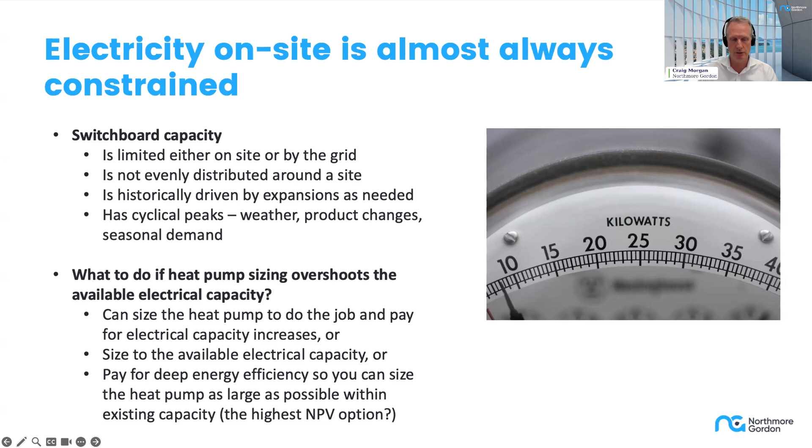So, well, I guess you could size the heat pump to do the job and just pay for the electrical upgrade. You can size it to the available electrical capacity, and that's certainly something we're recommending for some customers, that partial electrification is a pathway. Or you can use some of that avoided money you might have had to pay for electrical system upgrades to go a lot deeper on energy efficiency. And that way it means you can potentially size the heat pump or the electrification project as large as possible. And because you're going to get energy savings as well, it's probably the highest NPV option.

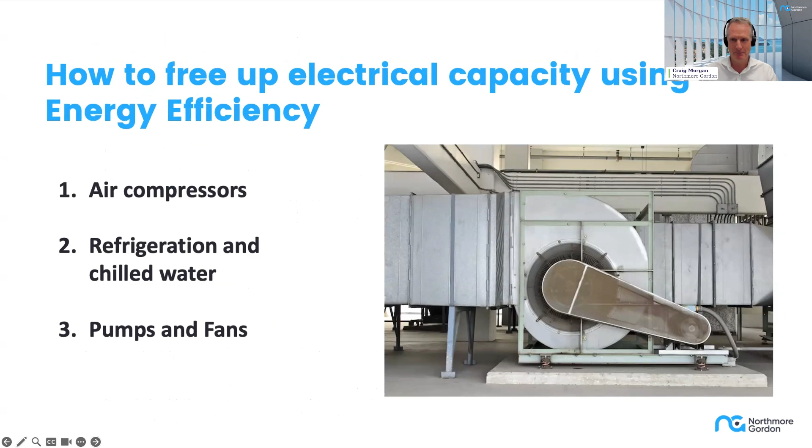And today, as I said, we're kind of going back old school here, focusing on air compressors, refrigeration and chilled water, and pumps and fans. Air compressors, for those of you who haven't been around air compressors a lot, you're probably not surprised, but I guess to point out that the total cost of ownership in air compressors is 80% dominated by their energy use.

And they can be a big consumer on sites. 3 to 7% might be, say, a typical manufacturing site, food and bev, for example. It can be a lot higher on smaller sites. And the largest I've seen was a 15 megawatt compressed air system in a shipyard, and it was 40% of site use. They're quite exceptional, not typical, I would say.

So what do we do with air compressors? Well, I'd have to say, jumping forward to my final point there, I can envisage today when plants are going to be built with no compressed air at all. I think that's actually something that is coming. So in terms of electrification, get rid of compressed air and you'll reduce demand as well. But opportunities do abound, and we generally split those into supply side and demand side.

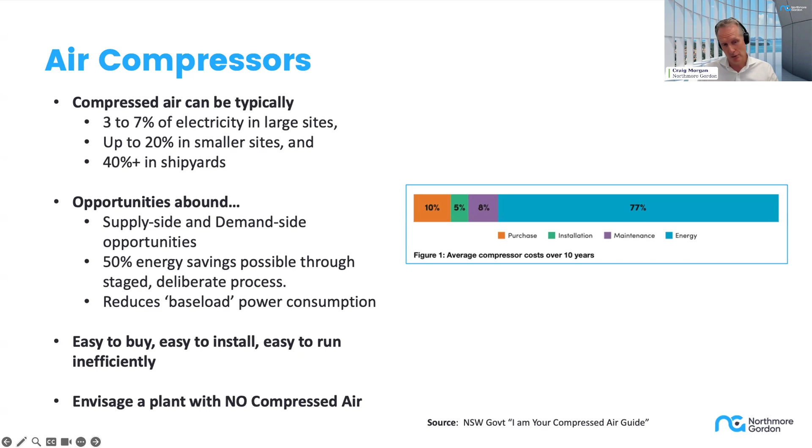And as I take you through this, you'll see that 50% savings is not extreme, it's entirely possible. Air compressors are easy to buy, easy to install, and if you include the dryers as well, easy to run inefficiently. So we have done a lot of measurement of compressed air systems. So we're just talking about the supply side here. We're talking about going back to this adage of you can't manage what you don't measure.

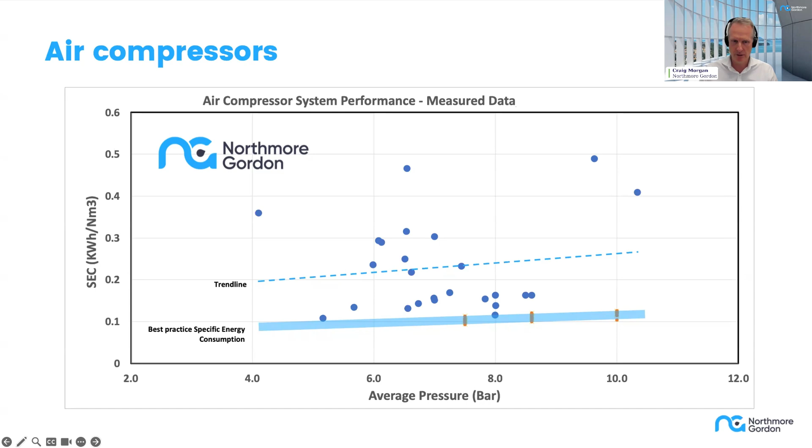The specific energy consumption of compressed air can be measured in a number of ways, but put simply, energy in, air out. And what we found in measuring over 30 systems is that over half are twice the sort of ideal or best practice specific energy consumption. So that's from real data, average industry, 30 sample points across a range of pressures. You do tend to find the bigger sites are around the lower SEC, so closer to ideal performance. But overall, it's pretty hard to walk out of a site and not have some good opportunities for compressed air.

So the information in this diagram here can be found in the New South Wales Government publication, I Am Your Compressed Air Guide. Full disclosure, we did help contribute substantially to this one, so I like it. But the government themselves did this drawing, and I think it's a really good way in one page to capture the opportunities in optimizing compressed air.

And one of the biggest opportunities on the supply side is really just getting your sizing and your sequencing right for your compressors. So sometimes that does mean a new compressor. Other times it just means controlling the ones you've got better. And there are many options to do that. On the demand side, only one of these 15 actions is about leak management. It's a big one, but it is only one. There are many other things you can do to reduce demand.

I guess there's two examples I'll just give from recent observations in humid environments where dehumidification of compressed air is really important. We had a site that was losing 20% of the total air they generated through the desiccant dryers because it was just on a timer-based control.

Equally, they had some wastewater pumping applications, and they're using compressed air vacuum pumps and compressed air diaphragm pumps, and they are just absolute beasts for sucking up compressed air. And there are alternatives. There are electric-driven diaphragm pumps. You don't need to throw away the diaphragm pump. You just need to electrify it. So there are many, many options, everything from system design to maintenance to avoiding the use of compressed air completely.

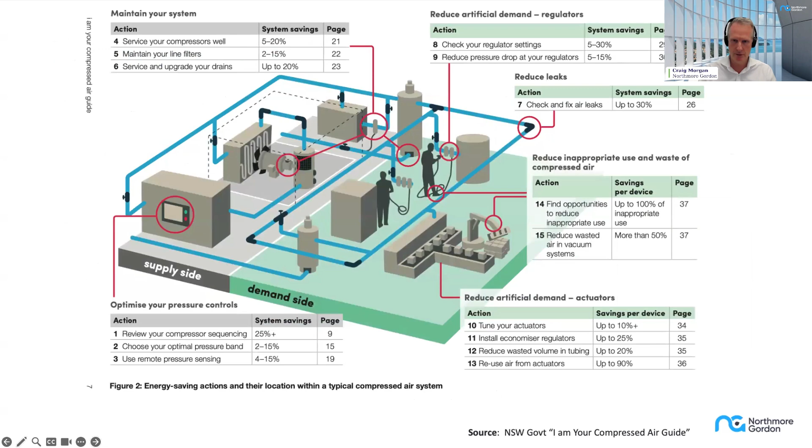Oops, wrong way. Oops, what am I doing here?

All right. Okay, so jumping over to refrigeration. Now, refrigeration has a lot of similar opportunities because you have several compressors in a system and you're looking to optimize overall system efficiency. Up to 40% demand savings are totally possible, and we've seen it. I saw it 20 years ago. One of the first really big VSDs went in on a brewery site to control the refrigeration compressor. They put in floating head pressure control. 30% measured and verified reductions out of that system happened once the project was done. And that's 20 years ago. And there's still many, many systems around that don't have that capability.

And also things change as well, right? So we know that production on a lot of sites changes. And so what that means is low-hanging fruit does regrow. You would have heard that saying before, because the load profile of things changes, which means that the system you have may not be as adaptable or as efficient in delivering that particular load. Another good example, I haven't got a chart here, but we measured a bunch of chilled water systems and water-cooled chilled water systems. Singapore love a good standard.

They have set a standard, and they've set a standard for how you measure these things. And for large systems over about a megawatt of refrigeration, the target delivered through existing technology, known technology, and good control and management and good system design, not any more expensive than a badly designed system if you were putting it in new. The target is around 0.64 kilowatts per RT for a system delivering, say, 6 degree, 7 degree chill water.

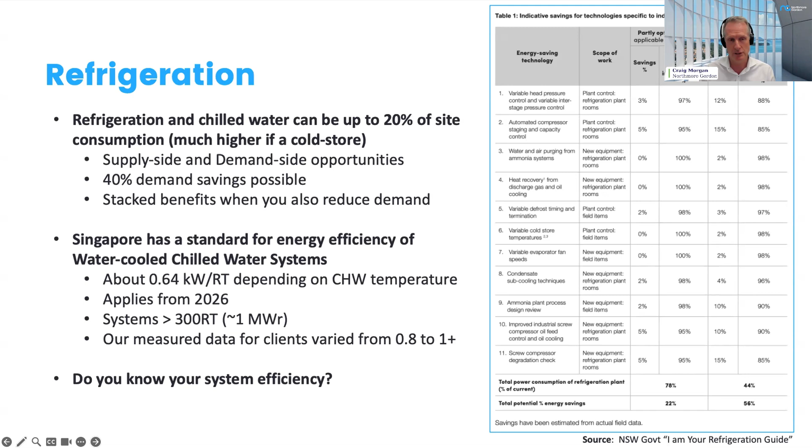Most of the systems we measured delivering that temperature were at 0.8 to 1.2 actually. So we know when you put measurement on these things, they are not operating as efficiently as they could be. And the big question at the very start, if you look at just compressed air and refrigeration utilities delivering to a plant, do you know your system efficiency?

Once you do know your system efficiency, that's just delivering the utility efficiently, then you can go through all these opportunities to reduce consumption. And it reduces not only consumption, but also the total kilowatt demand. So what that does is frees up headroom in your switchboard that allows you to electrify further in areas of your plant.

So in sizing though, or working out, in particular in the refrigeration system, how much peak demand you're going to reduce, there are some important things to consider. It is different than compressed air because maximum demand can occur on that refrigeration system at peak times, on the hottest day with the largest refrigeration load at times of highest production. So then you can go beyond that and say, well, what coincident loads are happening at that time? Can we manage them? Can we look at thermal energy storage?

And in this case, I'm not talking about hot energy storage, I'm talking about cold energy storage. Ice systems have been in place in the industry for a very long time. In fact, they went out of favor. Everyone was ripping them out. Now, I would suggest put them back in. They're not new. They've been around for years and years. And just make ice during those times that Ian's going to give you a great network tariff and the wholesale price is down, and just run chill water through that.

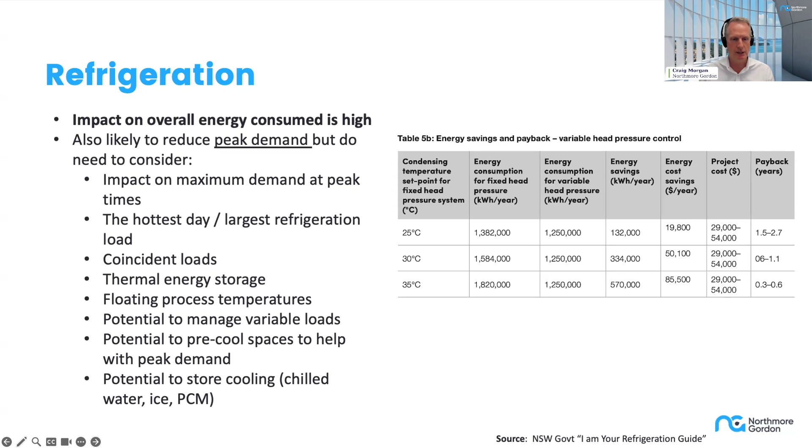And they can be hours of storage. And it's a battery, it's just a thermal battery. So I'm sure that James could manage that as much as an electric battery, could manage a thermal battery or a cold battery. There are other ways to avoid peak loads by floating process temperatures, cool store temperatures, either down or up. So pre-cool if you know you've got a peak coming up. Managing variable loads, and I've already talked about sort of cold storage.

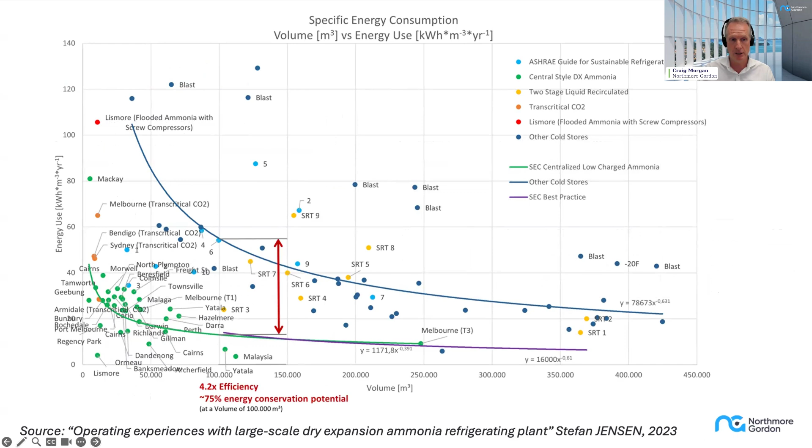This is just another set of data that reinforces how efficiency in systems varies substantially. You can see the source there, you'll get the slides. I'd recommend you go and have a look at that. There's a lot of work being done on mapping the efficiency of systems.

And finally, I feel like pumps and fans have been forgotten. They're up to 40% of some industrial sites. High system efficiency is the goal. So efficient motors running in their optimum load point. Efficient pumps, good impellers, well designed. Efficient fans, big fat pipes, as slow flow as possible because of the increasing energy consumption exponentially with increasing speed through ducts and pipes.

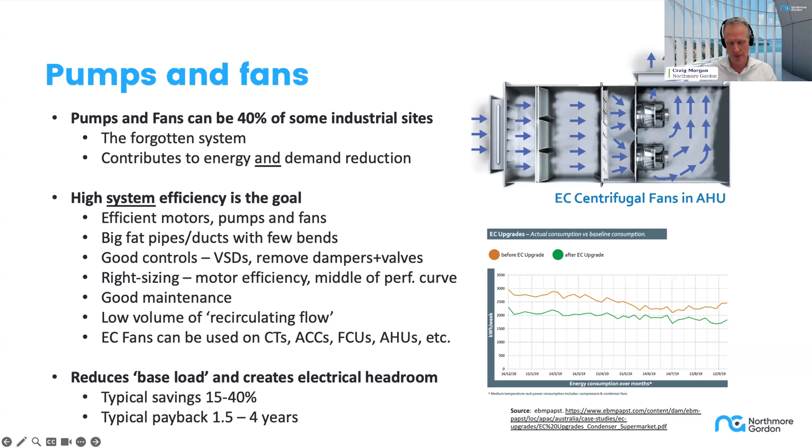Good controls. VSDs are really common these days, I'm sure, but there's still lots of systems where there's high volumes of recirculating flow, and we know that you can replace fans with, in particular, EC fans, cooling tower applications, air-cooled systems, fan coil units, AHUs, etc. So all of those things help reduce a base load and create electrical headroom for you to do those other electrification things before you go and buy that transformer. In addition, you get savings. So energy efficiency is that great decarbonisation tool, creating electrical headroom whilst getting you savings at the same time.